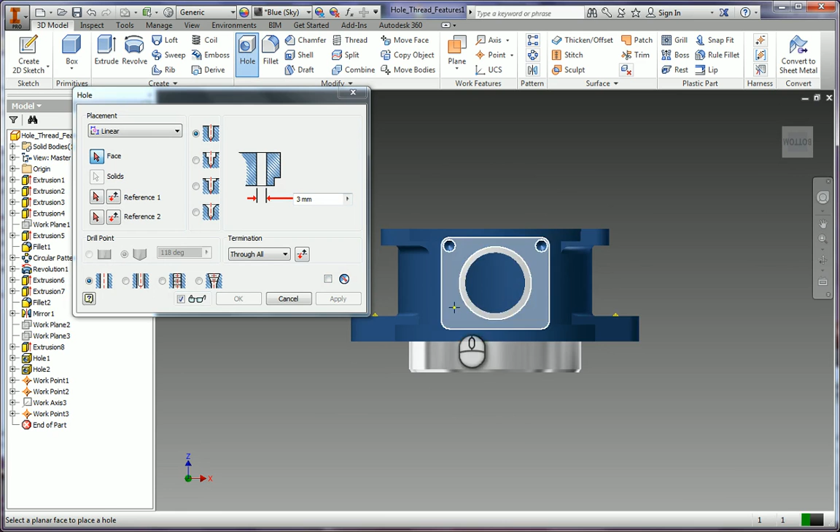You're going to start by going up to the ribbon and picking the Hole tool. It's going to open a menu kind of like this. You're going to click bottom, focus on this area right here, zoom in, and click right here.

It's going to initialize and pick the first point. We're going to use a linear placement for the first one. We're going to click one side, and it's going to set one side there. Click another side.

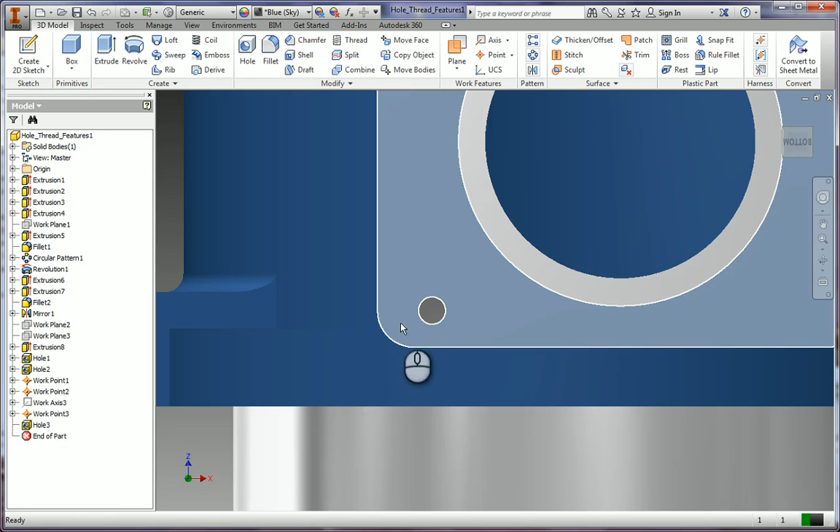Put 4 millimeters in, click enter. You really don't need to, that's just showing that you will set these equal to both sides. You can kind of notice how it is right there.

Now you open this up. I don't know why that did not change, but whatever. Now we'll go over here. We're going to make sure we have this countersink on.

We're going to click distance, and we're going to click right here for threading options. Your threading options are going to be ISO metric profile. You're going to go over here to size 6. Once it's over size 6, you're going to have...

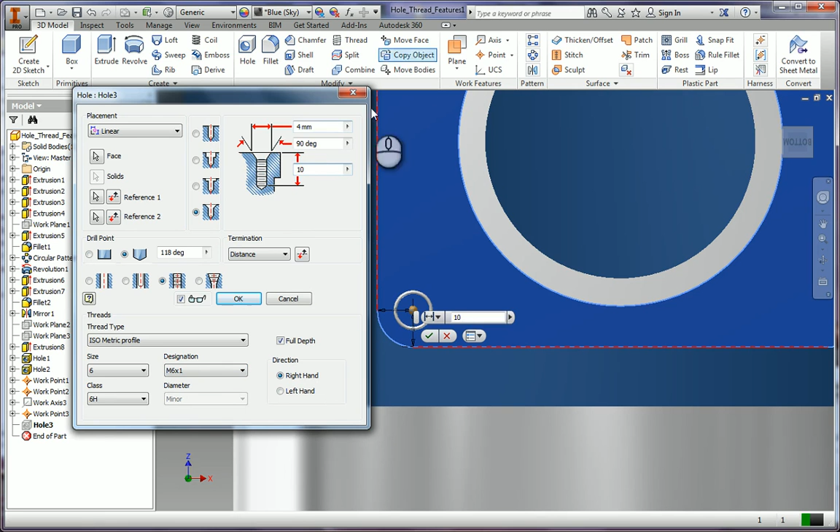M6X1 on. It's going to be right hand, full depth, and this is going to be 10 millimeters, and this is going to be 4. And once that's done, you're going to click OK. It's going to create a hole that matches all the others, with your threading right there, as you can see.

You're going to do it also right here, so go right back and click hole, right there. Reference 1 is this line, reference 2 is this line, 4 millimeters. Countersink, threading, distance is going to be 4 and 10.

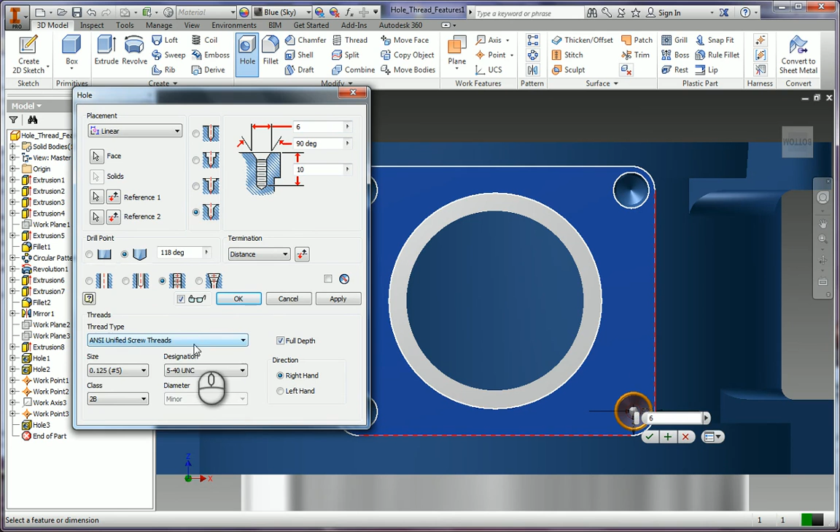This is going to be 6, full depth, ISO metric profile, your size is 6, M6x1, there you go, click OK. That's the first part. Now the second part, we're going to do a hole right here, right on the top. So that hole on the top is going to be an M6 tap hole with a flange.

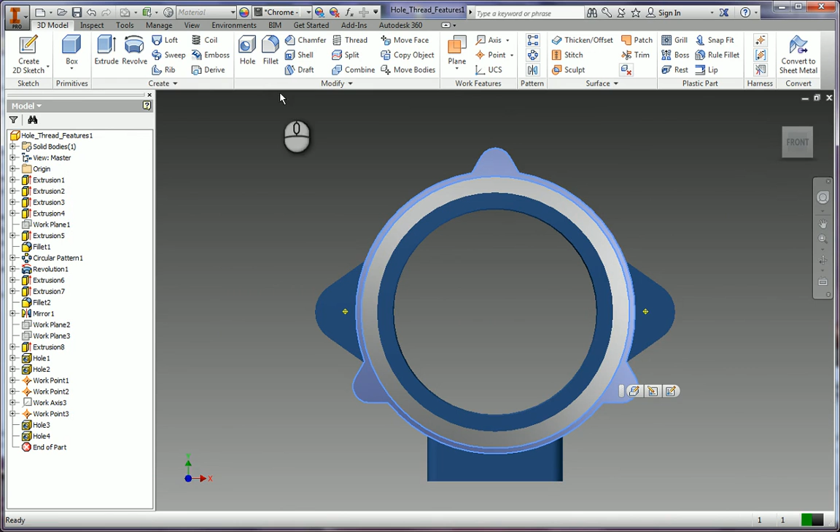So let's see if I can just get a better area on it. Okay, so we're going to get a hole. I want one right here. We're going to click the circle's edge and go in. So let's see here.

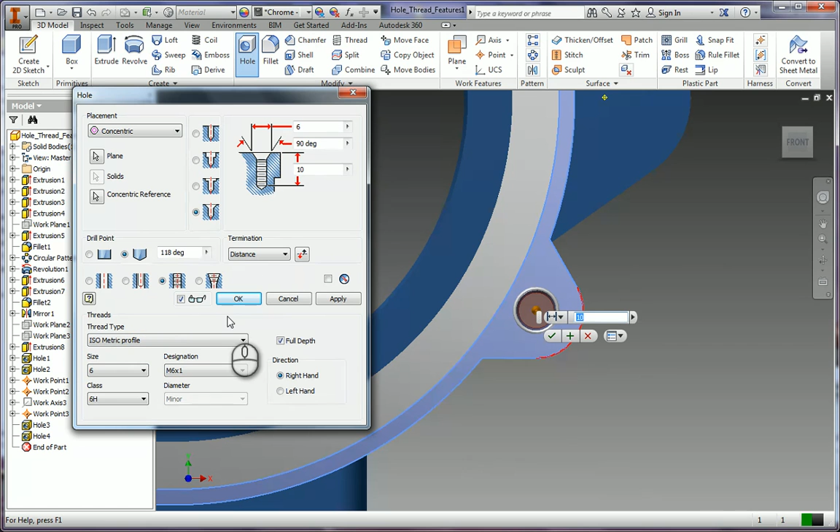Use the concentric option, place it off of that. Now you notice how this hole is concentric to the center point of the arc of that outer flange, not the radius. Once that's created, you're going to go to metric profile M6x1, you're good right there, and everything looks good. Then you can click apply and you're good.

And once you pull out, you'll notice how it's there. The next one, you're going to find this working point. The working point is going to be something that's a little bit difficult to find, maybe.

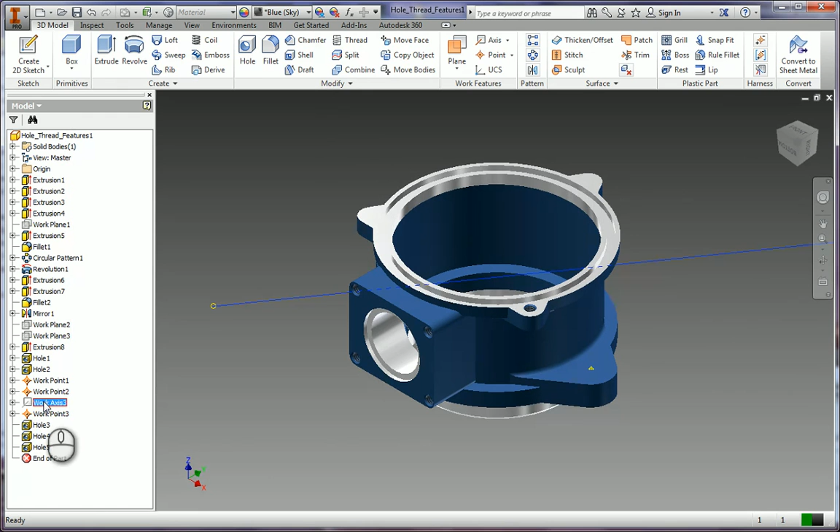So it's like right there. That's the work axis, and then the working point should be something that's very close. See how that's right there?

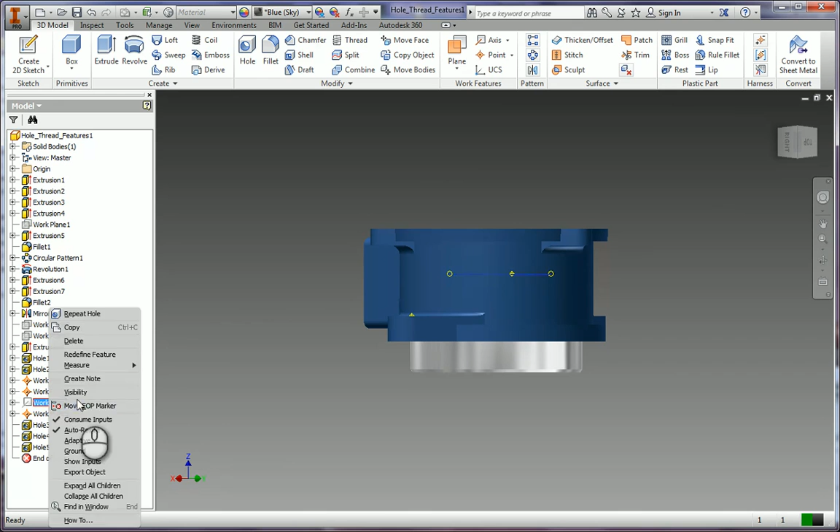It wants us to create a hole that is 4 millimeters with a termination all the way through, following that point. Visibility is on, not off. I'm going to turn on the axis right here, and then I'm going to create a point and a hole on the point. So I'm going to use point, click right there.

And then we want a 4 millimeter hole in diameter that has the termination set all the way through. So all the way through is the termination, and they want a...

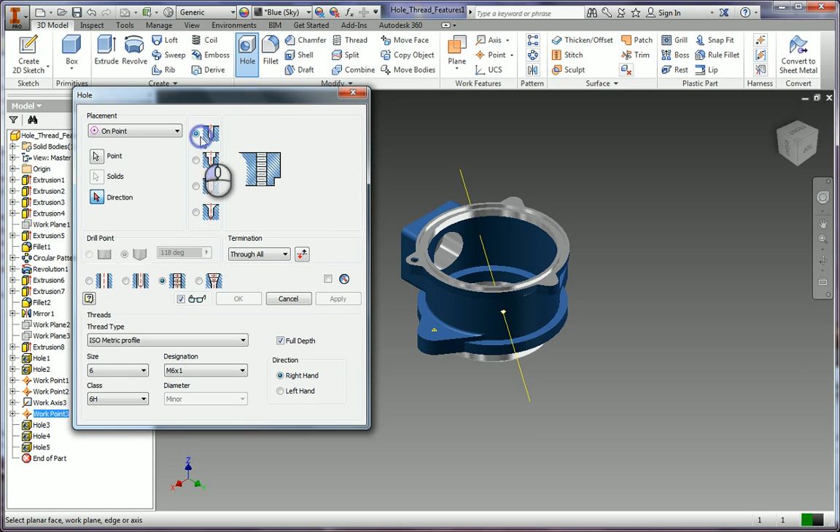They want this type of hole. I don't even know what that is. And right there, then it'll click apply, and you'll notice how there's 2 holes all the way through, right there and right there. And once you're done, if you want to, you can turn off the work axes.

Just right clicking visibility, and there you go. That's it. Now you can go into here, click, you're going to do a drawing.

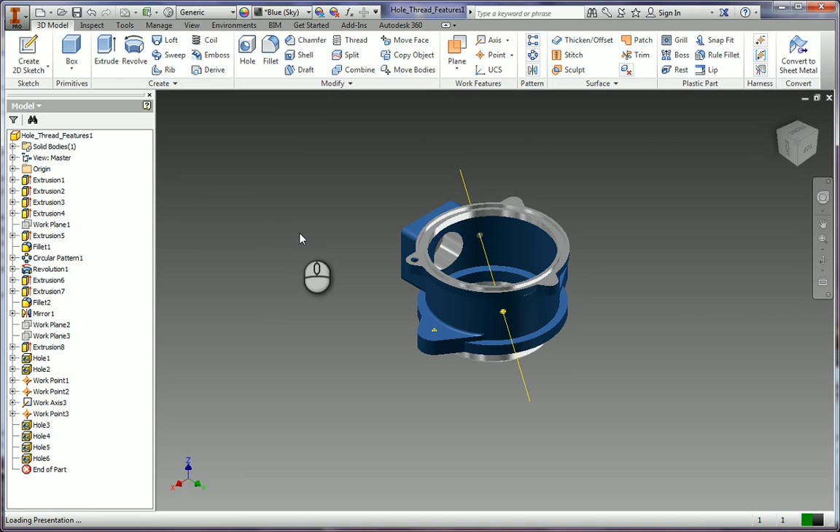It's going to pull up your presentation file, and once your presentation file is up, you make your base and you're good. So just show that really quickly, like this.

PDF it, and then you're totally fine. You just save as PDF. Do not save to the original file.